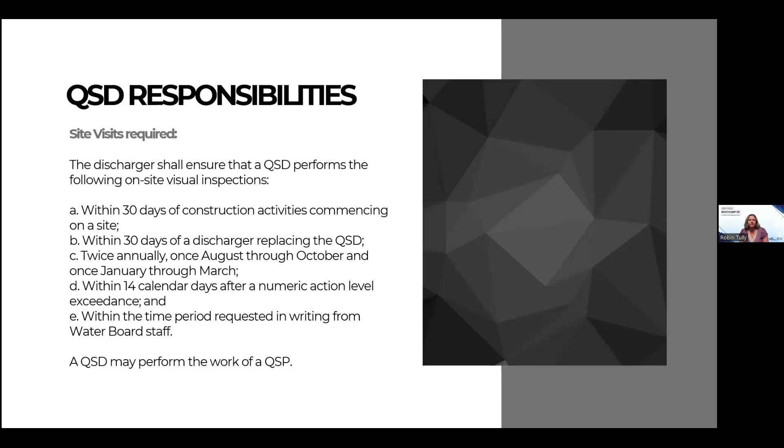All right. Next, I want to go into this Waterboard interview. It's about 17 minutes. I'll come back afterwards and talk a little bit more about some of the key things that they talked about and show you some good photos.

So anyway, these are two guys from the Central Valley Regional Water Quality Control Board that I've seen on site multiple times, and they are very good and insightful, and they're just trying to be helpful here. So they came for this interview. So hopefully we can get it to play.

My name is Jorge Belgium. I'm water resources control engineer with the Central Valley Regional Water Quality Control Board. My primary role here is construction stormwater inspection. And my name is Mike Fisher. I work with Central Valley Waterboard as well in compliance and enforcement. Deal with construction, industrial, stormwater, as well as wastewater treatment plants.

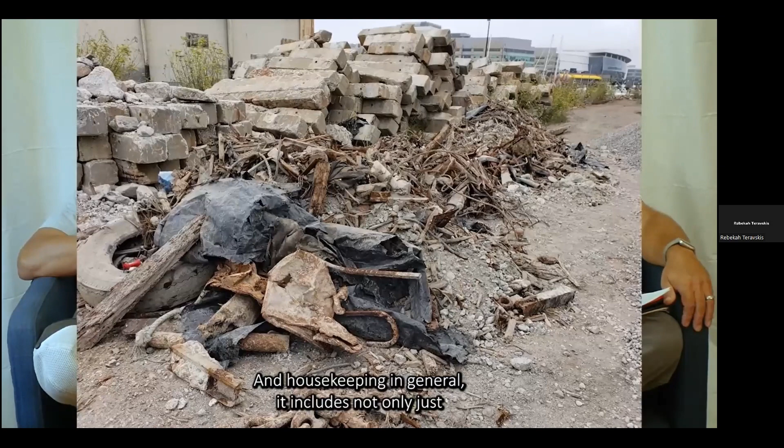Mike approached this question really well. He broke it down per season, and we're going to see different deficiencies depending on the season, right? But one thing that is pretty common and very prevalent throughout the whole year that we notice a lot, whether it's spring, summer, fall, winter, is the housekeeping, right? And this can manifest in very full dumpsters open during a storm event. It can manifest in garbage just being blown away to the winds during the hot months, right? And the housekeeping in general includes not only construction waste, but also concrete waste.

As the seasons change, we focus on different things. Obviously, the primary thing when it comes to winter is that the site has effective erosion sediment control BMPs to prevent a discharge. What erosion and sediment control BMPs would you like to see and when, especially winter? One thing to keep in mind, and we notice this in a lot of construction sites, particularly risk level 1 sites, whose erosion sediment control requirements are significantly less than risk level 2 and risk level 3 sites, particularly for active construction areas, right?

The trigger for risk level 2 and risk level 3 when it's raining is that the site be protected with erosion control at the time it starts raining, right? The trigger for risk level 1s is not really there for erosion control. But all the sites need to meet BAT/BCT requirements, right? Which translates back into erosion and sediment controls. Does your site have BMPs that meet BAT/BCT requirements?

A lot of construction sites that are risk level 1, because they don't have that in the permit to protect active areas with erosion control when it's raining, they will not do it. We see this, right? But as the site is discharging very turbid water, at this point they're not meeting the BAT/BCT requirements of the erosion sediment control BMPs. Where we see the biggest problem is in risk level 2 sites during the rainy season that don't have erosion control on active areas during a storm event and they're discharging water above the NALs, right? That is going to be a trigger every time.

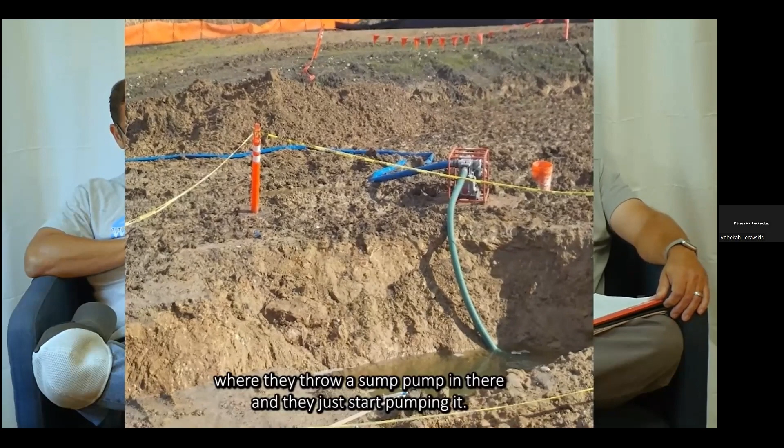If you're going to impound water, have a plan on how you're going to dispose of that water. There's quite a few sites that can hold water just fine most of the season. It'll infiltrate, it'll evaporate, and you're not going to have a problem. But there's a lot of sites that run out of capacity. And by the third, fourth, fifth storm, suddenly they need to dispose of that water. We've walked up on sites where they throw a sump pump in there and they just start pumping it. Sampling, yeah, maybe not. Is it going to a creek? In some instances, yeah, straight into the creek.

If you're going to store water, that's fine, but make sure you have a plan on how to dispose of that water if you're out of capacity. And you should really know how much capacity you have. I don't think the permit really requires that you calculate the capacity before you start doing it, but you should have an idea. Hey, 3 inches of rain is coming. Can I handle this or not? Right. It shouldn't be a gamble.

You should know. Also, if you're dewatering groundwater for construction, for installing utilities, our region does have a separate dewatering permit. In some regions, the construction stormwater general permit addresses dewatering, and they're covered under that. For our region, because we have a specific dewatering permit, if you're installing wells and pumping out groundwater, you need to contact our office, and there might be a waiver if you're land applying. There might be a separate NPDES general permit if you're dewatering and it's going to the storm drain or to surface water.

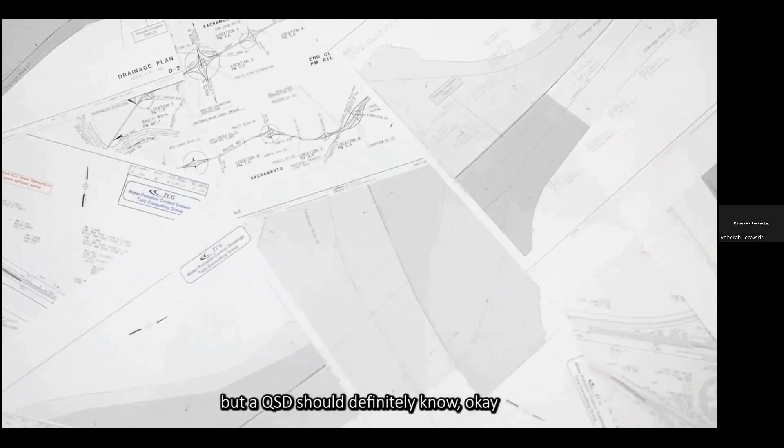If this is a development project, when they're going to vertical construction. In the meantime, like Mike said, there's a lot of phases in there, right? You have your clear and grubbing, and then you have your mass grading, rough grading, you go into your road cuts, and then you bring in your utilities and all that stuff. It may be overkill to have drawings for each one of these stages, but the QSD should definitely know when things are changing and the changes that they need to make on their guiding document for whoever's going to be on site to deploy.

I think this is what the QSP is going to be focusing on when out there doing inspection, right? Are the perimeter controls where they should be? A lot of times contractors will go out there and start clearing more area than is actually shown on the plans. I issued a lot of notices of non-compliance on sites that were under an acre, but the subs started opening more ground than they should have, and all of a sudden the municipality is letting me know, I think this is over an acre now. I'm like, oh, well, they need to sign up for coverage. I'm bringing this up to illustrate that a lot of times what we have in the initial drawing is going to change as the project moves on.

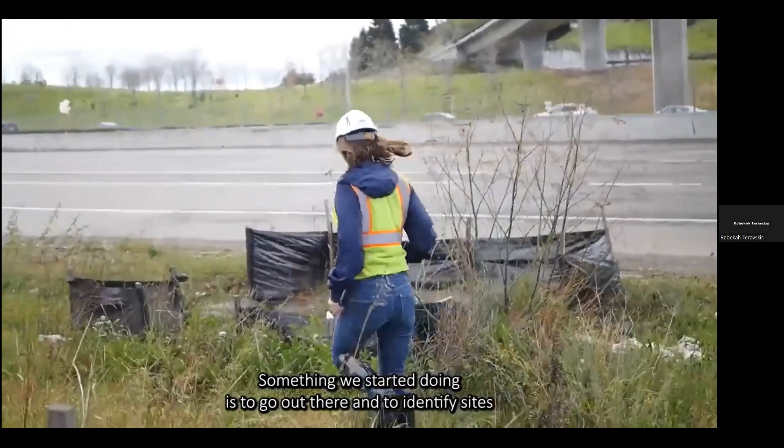I think it's definitely beneficial for a QSD to be out there as we go into the rainy season months to evaluate site conditions, and maybe the BMP plan may change completely. Something we started doing is to identify sites that are starting late, right? They're starting their grading in October, and it's a large site, which means a lot of open area as we go into the rainy season. So it's very beneficial for the QSD to be out there before the rainy season to get an inventory of what BMPs are needed and the stage the construction is in, because it may not pan out according to the schedule, and develop a winterization plan.

So the term winterization plan, you can search for it in our permit, it doesn't appear. No, it's something that we ask for informally after inspections. If we get to a site in the first week of October and they started grading 2 weeks ago and there's 50 acres open, that's gonna cause a little concern on our end.

So we're gonna ask for a winterization plan that basically communicates to us, once it starts raining, what's the site gonna look like? What is gonna be active through the winter, what's gonna be inactive, how you can protect the inactive areas, and how you can protect the active areas before a storm event, but also how long is it gonna take you to protect those areas?

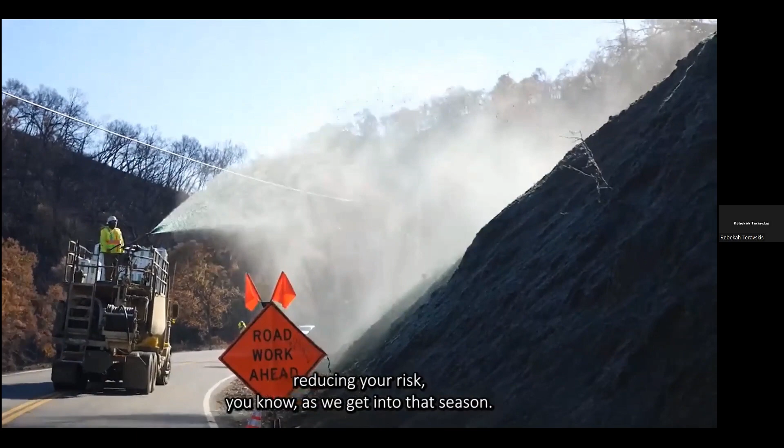Any other thoughts you might have for QSDs for achieving best compliance? This is a district permit, right? So winter or rainy season is really our primary focus. Something that to me is always important is start reducing your risk as we get into that season. A lot of times sites get into trouble because they're always waiting to either install that base rock or do that next lift or the last lift, and the roads end up staying open through the winter. And that creates a lot of problems for a lot of sites.

I think the story is, oh, we just need 2 more weeks, and in 2 more weeks we would have had the whole site paved. If it looks like you're not gonna get there, I would say at the very beginning, this is an autumn thing, right? Whatever we get done up to this point, we get done. After that point, let's start reducing our footprint, let's start reducing our risk.

And I think that's really important to talk about with the project owners and the other project managers. We need to start thinking about how far we can really get so that we don't get caught behind. What happens is once it starts raining and you haven't implemented BMPs, you're just bleeding until it stops raining and you're able to do what you should have done 3 weeks before.

Yeah, the permit definitely allows you to continue construction through winter. We're not saying, hey, October 15th, stop it. No. You can grade through winter if you put in the BMPs before rain events, but it's gonna be pretty costly to have big areas open through the winter. So the smaller your disturbed area is in winter, the easier and probably cheaper it's gonna be as far as BMPs go. I know there's always other concerns with schedules and milestones, but yeah, shrink it.

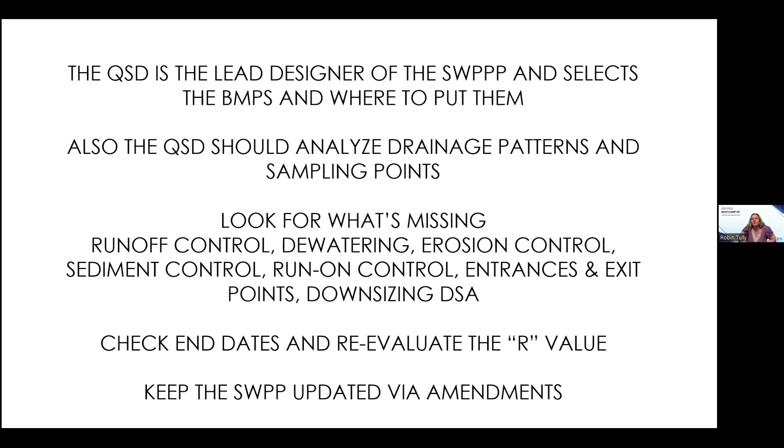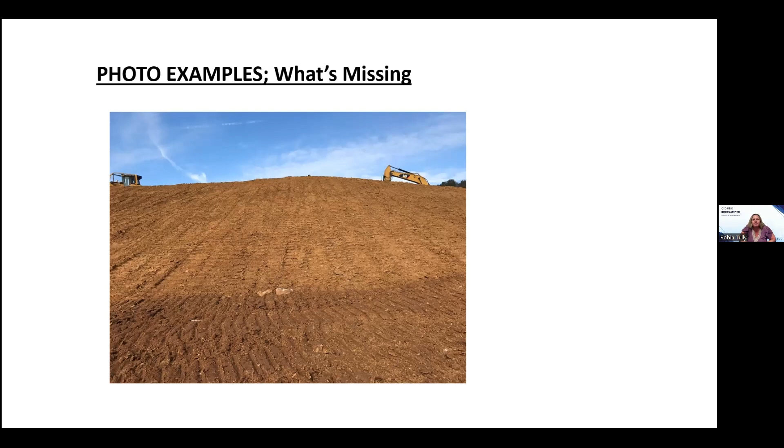So sediment controls, they can stop maybe those small, little 1/2-inch rainstorms in the summer. But come winter time, when you're getting back-to-back storms, or maybe we're going to have an atmospheric river again and it dumps 7 inches of rain in a day. That happened. That's not going to cut it without erosion control. So you really got to lead your client to get that erosion control in ahead of time.

But you really need that erosion control. That's the key thing. That's going to help keep your sediment on site where it is. So that's your hydroseeding and your bonded fiber matrix, hydraulic mulch, blankets, etc. And we'll talk about that.

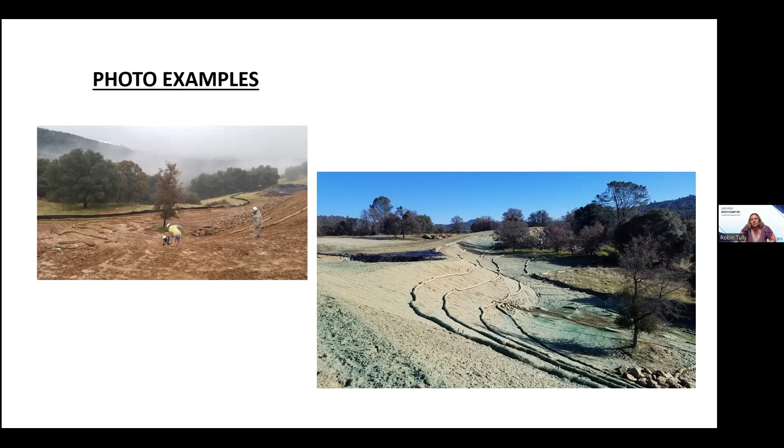And then by the time they called the erosion control guys, the subs just weren't able to get out there until after a couple rains had passed. And unfortunately, this led to a lot of turbid water getting into a creek downstream. And the Water Board showed up Monday morning at 7 a.m., followed it all the way down the slope to the creek, and this resulted in a $130,000 fine.

That was 2016, and I'm here to tell you that nowadays the fines that your site could possibly be facing, and you'll get drug into, are in the millions. So I don't think anything's out of the norm now to see the Water Board come at your client for 1.2 to 1.6 million or something like that. So you really want to avoid this. I don't want this happening to you. So let's think ahead. Let's get out there and see what we can help people do for winterization.

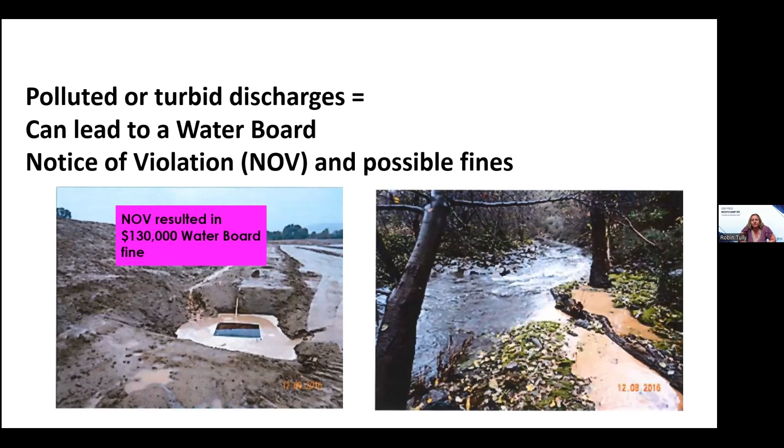And then it would have a new dike eventually. So that gravel bag berm was a really good temporary run-on control that I think is very important. And if you did nothing, the two things that were probably the key things were getting that run-on control, that gravel bag berm, and the silt fence. But all of these BMPs obviously did the best. And this was probably one of our most successful slopes after we got it fully buttoned up.

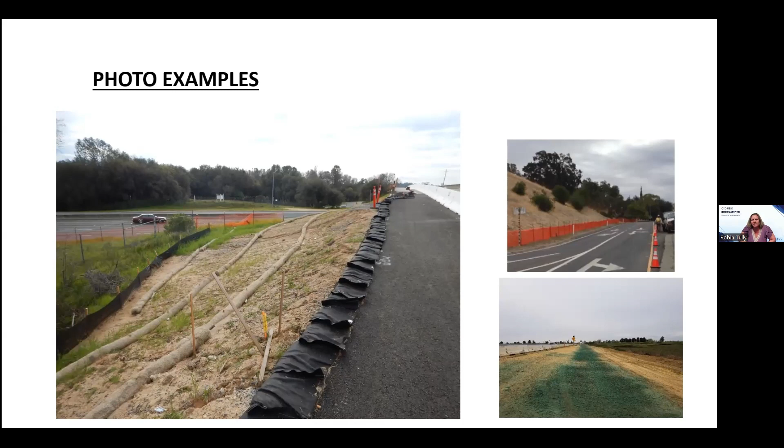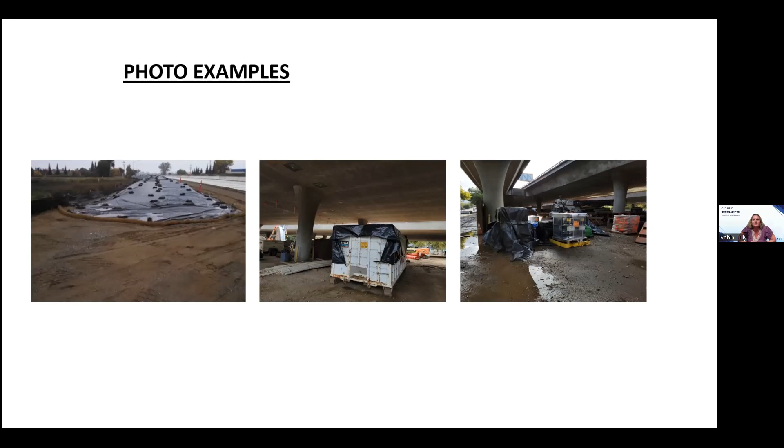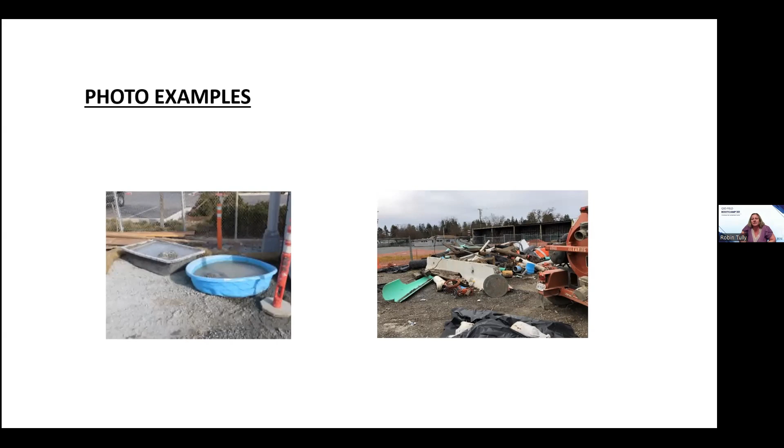So think about that. And then like the Water Board said, housekeeping, that's always a big consideration. You really want to have your client keep up on their housekeeping. This is also a Water Board attractant. If your site looks like crap from a drive-by, it's going to encourage them to come in. So having your site looking good and clean is pretty important. Also, that waste, when rain hits it, whatever the chemicals are that are in there are possibly contacting the stormwater and running off. So that's a source of pollution. So good housekeeping is very important.

All right, so erosion control. You're the QSD, so I challenge you to pick the right type of erosion control for your site. The QSP is not technically responsible for that. So you should be determining the type of erosion control in your SWPPP, and then again, coming out to the site and making sure to adjust that if something is needed. So I'm just talking about the major types here. We've got our geotextile blankets. We've got plastic cover. Obviously the Water Board doesn't want to see a lot of plastic cover, but there is a time and a place for it.

When you've got an active slope you want to protect for rain, and then they want to work on it a couple days later after the rain, that plastic will keep that slope dry. So there is a time and a place for plastic.

Number 3 is temporary hydraulic mulch. That's a really good one for large areas, and one that we really encourage over the winter time to plan ahead. There's hydroseeding, which is your hydraulic mulch with the seed included. That's your permanent erosion control generally. Mostly you're not going to use that for temporary measures, but you might have some areas that are ready. And if you have areas that are ready, absolutely get your permanent hydroseeding on them. That'll help.

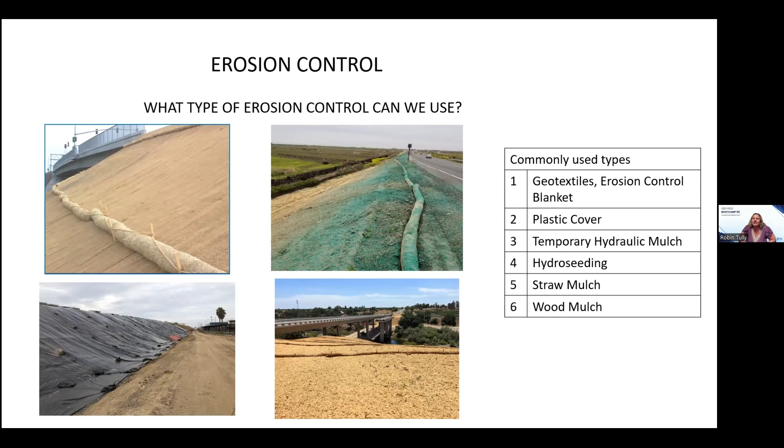We have straw mulch. We've used it in limited cases. There is a time and a place for it. And then wood mulch. Wood mulch is also a consideration for erosion control.

All right, let me check the time and see how we're doing. All right, 1:38. All right, we're doing good.

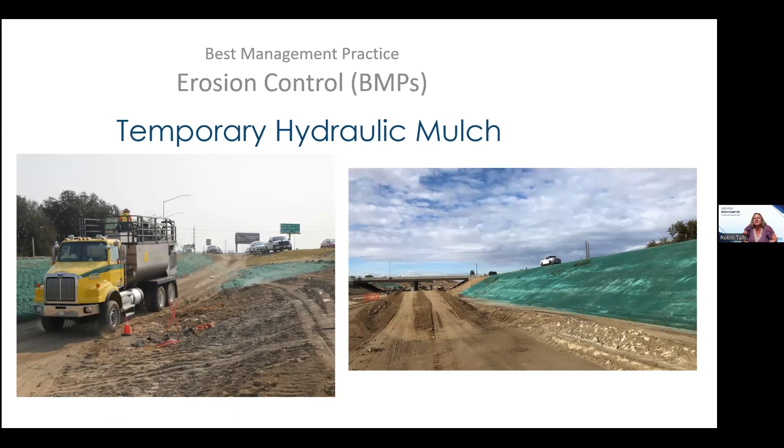All right, so here's what temporary hydraulic mulch looks like. Very good for covering large areas. You just want to make sure you get it implemented ahead of time, ahead of rains, because it needs a day or two to set up. Caltrans specs, for example, will actually have a specified minimum time frame. So if you apply it too close to the rain, or even in the rain, one, it's just not going to set up well. And two, you might not be getting paid for it, or your client might not be getting paid for it. So pay attention to that. You really want to encourage that to be applied as early as possible.

Blankets are excellent. They are a great way to really protect your soil without a lot of hassle over the winter, because you're not going to be able to go respray erosion control. These are an excellent way to get erosion control, but make sure that they're keyed in properly. So you want to have a key trench at the top, and then they're rolled down the slope and overlapped, and pinned in.

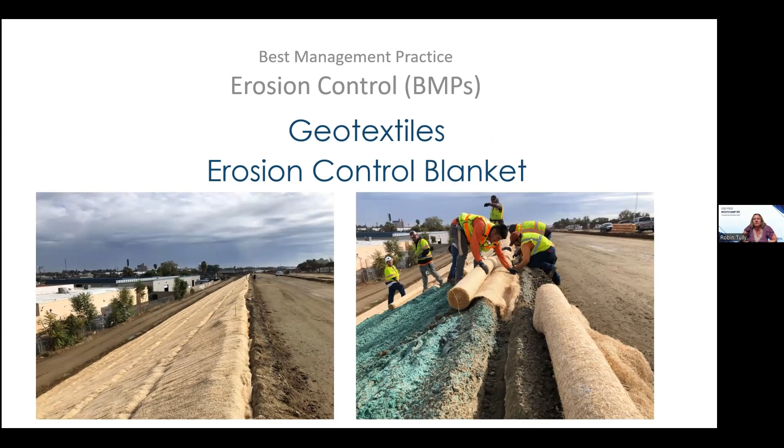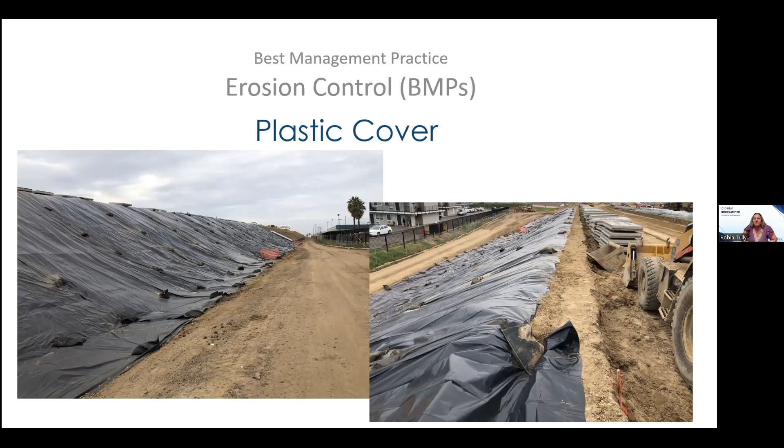Plastic is a great way to protect an active slope that the contractor wants to get in and work on a couple days after the rain, so there is that time and a place for plastic. Again, do make sure that that is keyed in properly at the top of the slope. Otherwise, you can get water underneath that plastic, and it can be as if your plastic wasn't even there. So that key trench on your plastics and your geotextiles is hugely important.

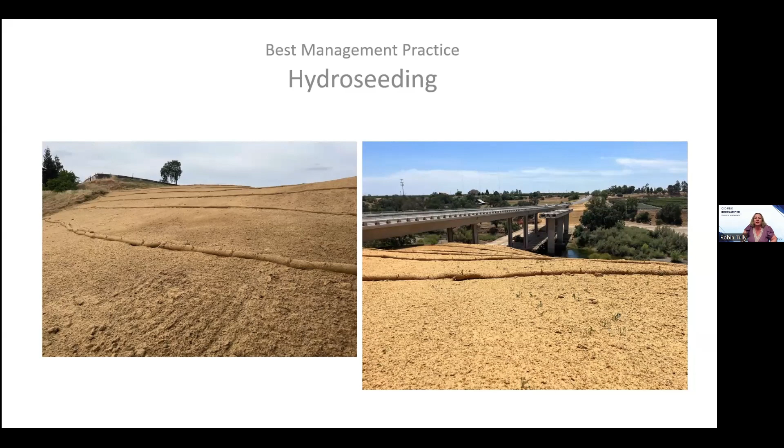Straw mulch. This is some permanent erosion control. There was some hydroseeding, and the spec called out for straw mulch on top. Straw mulch to be effective should be tackified. So don't think that the contractor can just spread it out there and it's going to be effective. It really needs a good coat, like 4 to 6 inches, and it needs to be tackified on the top. But then it can be great.

This straw mulch actually was very effective at establishing the hydroseeding, because it was giving a nice cushiony blanket to prevent a lot of the friction of the rain hitting the soil and dislodging soil particles. So it's protecting that soil just like a blanket. But also it was providing some good ground cover, keeping that seed warm until it got established. So straw mulch can be a great thing.

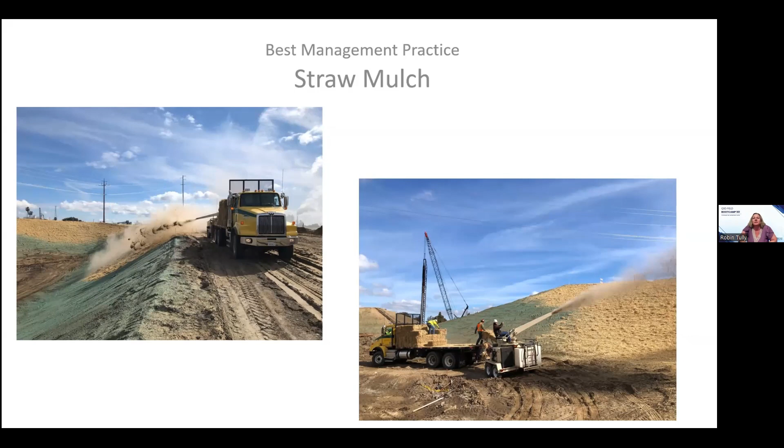And wood mulch. So let's say you have a site where you've trimmed or cut out some trees, chip them up in place, save that wood mulch, especially over winter time. A lot of the contractors have to get in and cut down trees before the birds start nesting in them. So the contractor might have to go in and work in the winter on a site. I would encourage them to keep those wood chips there, because they make great and free erosion control.

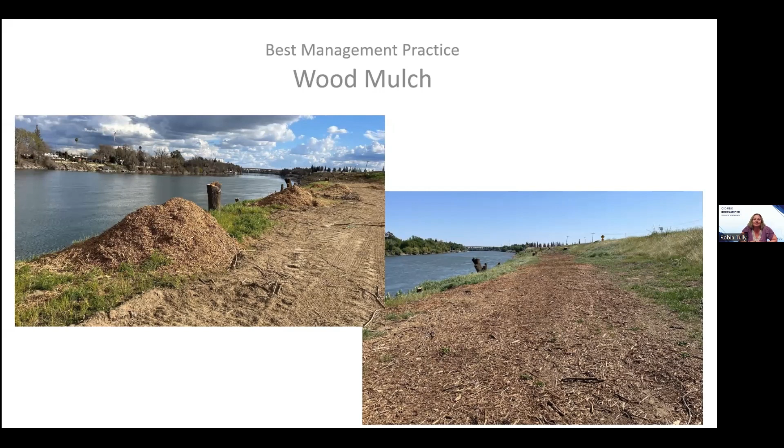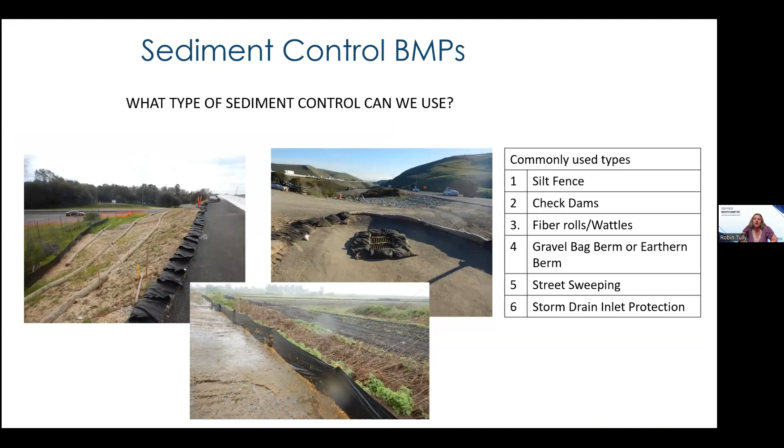Sediment control BMPs. So these are very important. They should be there all year round. There are different ones for your toolbox. So I'm listing the most common ones here that you're going to need to plan for and should be already in your SWPPP: silt fence, check dams, fiber rolls, gravel bag berms or earthen berms, street sweeping, that's a sediment control as well, and storm drain inlet protection.

So fiber roll, I'm running out of time, so I don't want to go too in depth. If you want these slides, I can give them to you. These are some key takeaways.

But the important takeaways on fiber roll is just make sure it's ideally on a level contour. It's got to be trenched in and staked in properly. And just make sure that they maintain it and use it for those slope interruptions. Don't just have a fiber roll at the top or the bottom. Have it every 10 feet if you have a 2-to-1 slope. In the BMP fact sheets, there should be a table for different slope inclinations, what fiber roll spacing is adequate.

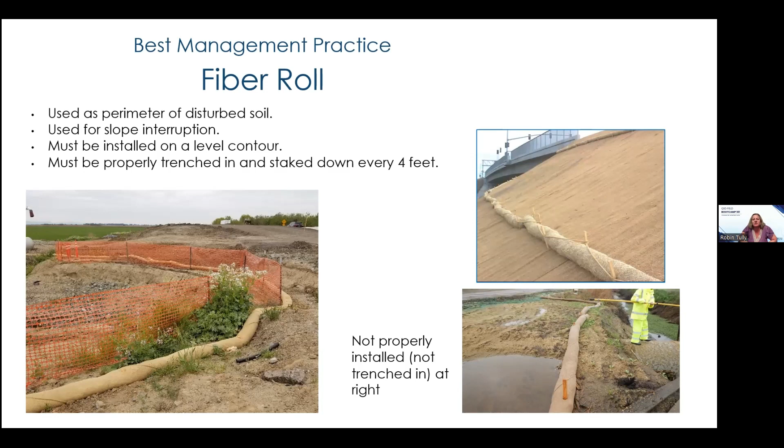Silt fence. Don't put your silt fence on the slope. Don't put it in a flow line. Those are some key takeaways. Make sure that it is properly trenched in and staked in. Make sure your joints are overlapped. Make sure the stakes are on the right side. One of the pictures on the bottom slide is the stakes were on the inside.

That was done for wildlife purposes, because they didn't want the critters climbing up the stakes if they were on the outside and getting into the job site, mice and such. But just think about that. If it's an ESA fence, it's keeping out your wildlife, but you can't really use it as a silt fence. So if you are using this for silt fence to impound water, make sure those stakes are on that back side. So those are just some key takeaways.

Make sure you put it at your bottom of the slopes, far enough off the toe of the slope so that any erosion that's coming down isn't going to immediately overtop the silt fence. Give a little space there at the toe for that sediment to collect before it starts backing up against the silt fence.

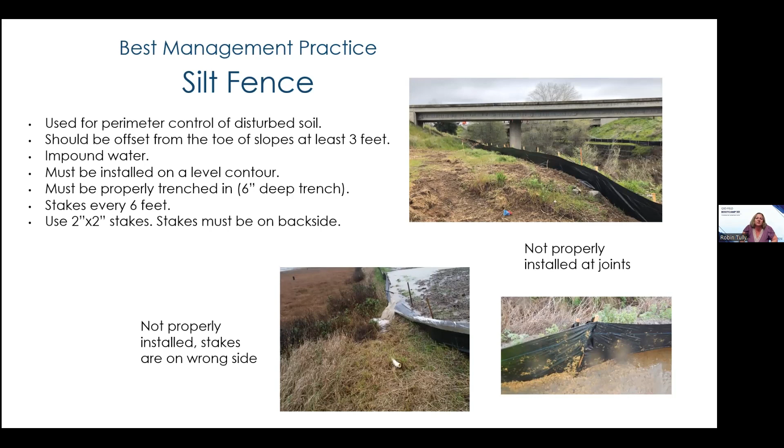Gravel bags. Gravel bags are a great check dam, and they also can make great inlet protection. They are very good at keeping sediment and water out. So do be very careful with where they are placed. If you do use them as a check dam, make sure that they follow the details and take out like the center bag or two, so that the water can actually go over the check dam without being too impounded and going around the sides and causing erosion around the sides.

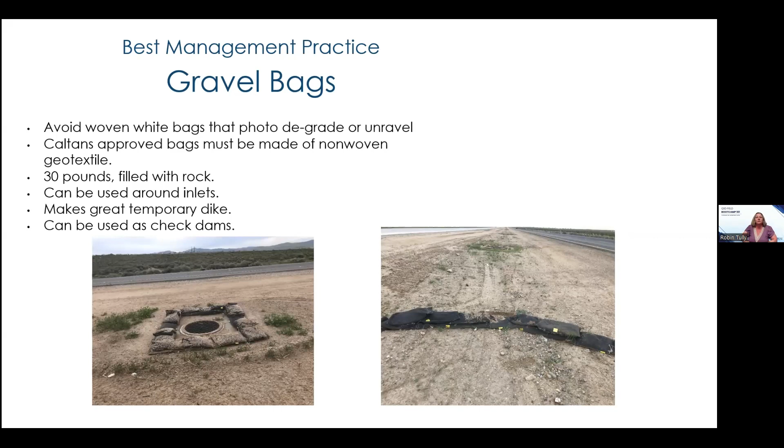So gravel bags are a great tool. That one picture that I had prior, and I'll show it again, they were using as a temporary dike where your AC dike is missing. So they can be very, very useful. These are always great too as your catch-all emergency BMP. Have the contractor have a pallet or two of gravel bags on site for problem areas over the winter.

Storm drain inlet protection. This should be in all year round. The thing I want to mention here is to avoid filter fabric in the wintertime. You can use filter fabric in the summertime to protect your inlets, say from paving and paving materials, and you don't want anything getting into those inlets. But it's not a Caltrans approved BMP. So if you're on a Caltrans job, don't use filter fabric, use an approved sediment bag.

And then definitely by wintertime, any filter fabric that you had in place, make sure that you put in those sediment bags and take the filter fabric out, because the filter fabric will block flow. And wintertime, you have to have your water flowing, unless you can impound everything and you've done the calculations to show that you can adequately contain all your water. I'm going to tell you, most sites can't over winter, they just don't have the space.

So you've got to make sure to get your erosion control. So keep your dirt in place in the first place, and then have those inlets protected properly so that they can drain, and hopefully filtering out turbidity.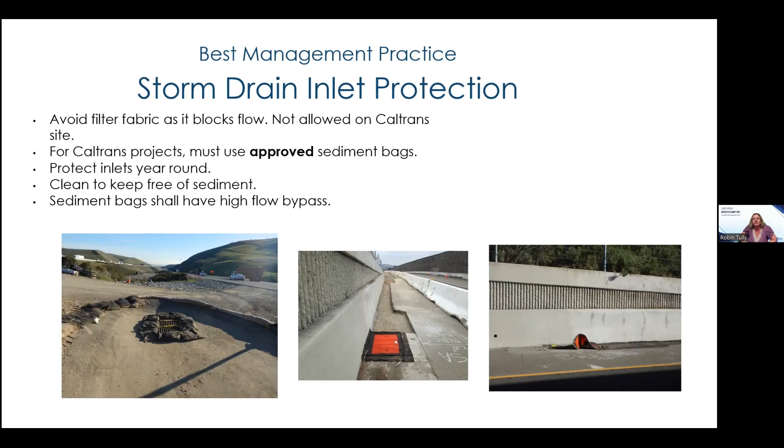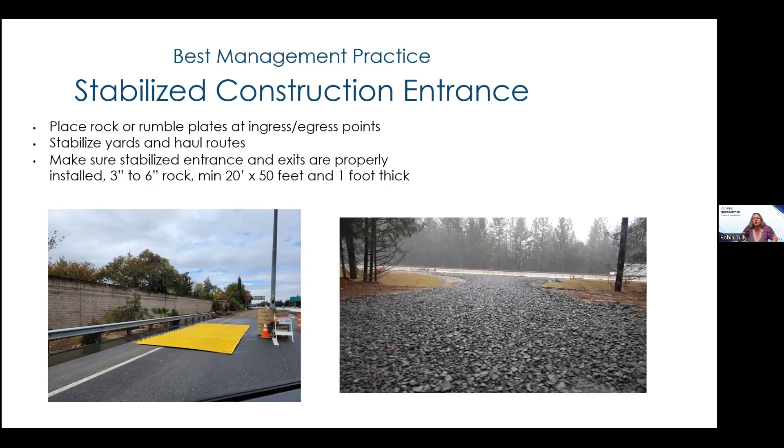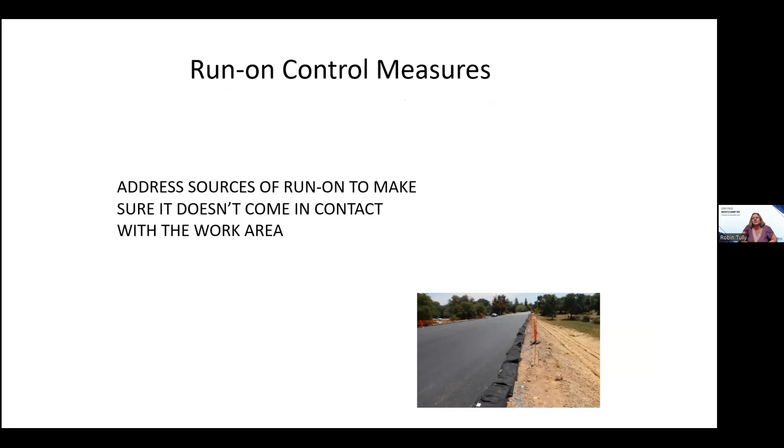I'll talk about run-on control measures. So I talked about them before. That gravel bag berm is one very good example to keep that run-on from the roadway from going over the slopes. So you want to address your sources of run-on to make sure it doesn't come in contact with the work area. So you as the QSD, go out there and see what's missing. What run-on control measures are you missing?

Here's some photo examples of what can happen when you don't have good run-on control. This was the vertical clearance job where we thought we had it in good control. It had hydraulic mulch, it had the fiber roll, it had some silt fence in place, but the dike was missing and a lot more water came off the bridge than anticipated. It was a heavy storm. I got there and I was monitoring it, and it was like a 2-inch rill.

And I was like, shoot, well, we'll have to get something back when it dries out and we can get back here and work on it. But what happened though is a thunder cell came through, and as I was driving away, I think I was 15 minutes down the road, I went through this thunder cell and it was just dumping buckets, and I went, oh crap, what's going to happen? And sure enough, I came back the next day, and those 2-inch rills were 2-foot rills, due to the water coming off the bridge and going down the slope. Luckily, it mostly was stopped by the silt fence.

It got beyond a little bit and we had a little bit of cleanup, but we talked to him about getting out gravel bags for that run-on control, and that worked awesome. That kept the water off the slope and made sure that the water was going down to an inlet instead of over the slope. So that run-on control is super important.

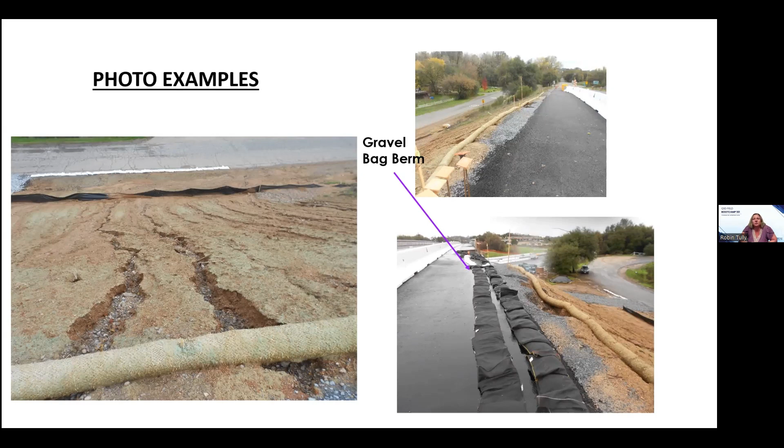So think about that. Other sources of run-on: this is a highway job where, again, the plan is there's going to be storm drainage there and a new roadway there, but it's not there yet. They're grading it. And going into winter time, we need some temporary drainage. So think about that. Your new road isn't there yet. So here's a culvert outletting out of the job site. We needed to figure out a way to get it safely through the job site without causing erosion.

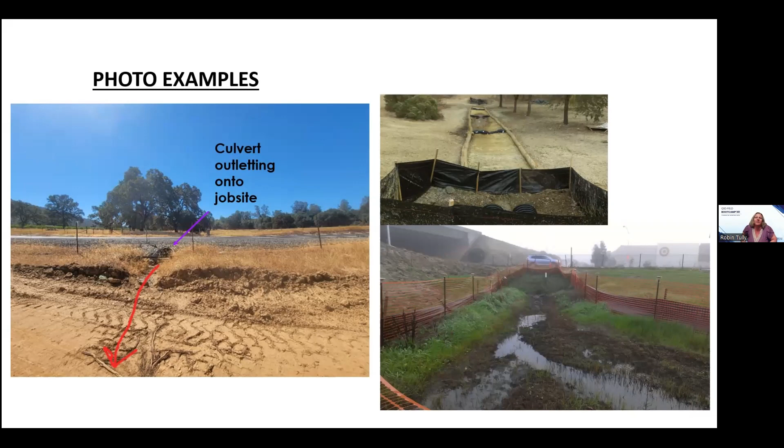The photos at the right are just some examples, not that particular job, but different jobs where we had the culverts coming into the job site, and we appropriately protected it and gave it a safe flow path that was protected to get through the job site. There's that run-on again coming through the job site. This was on Highway 50 many years ago. So 65th Street.

Another thing that you got to think about is your slope conveyance. Do you have water coming over your slopes that needs to go over that slope because maybe the down drain isn't there? So maybe you're putting in a down drain, designing that down drain in, or you're giving it a temporary flow path. This was an example of, we had some runoff coming off the roadway and it needed to go down there. So there was an overside drain there before. So we gave it a flow path.

We lined it with plastic. Maybe not the super best example, a pipe would have probably been better, but there just wasn't the way to get that configured in. So give the water a safe flow path down slopes without causing erosion. So think about where do you need those during winter time.

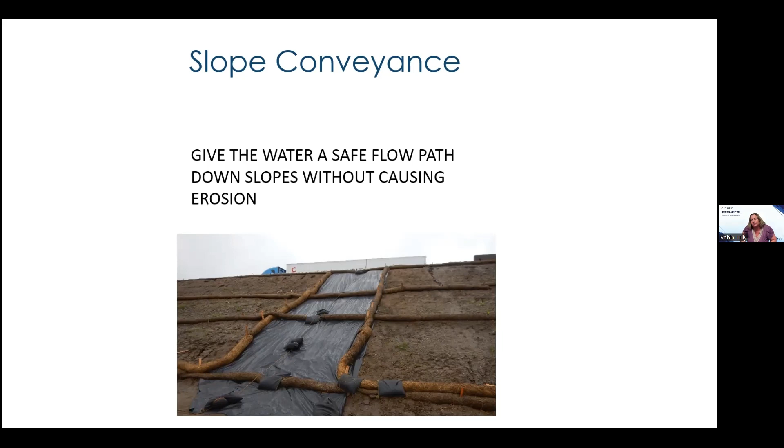All right, that's probably all we have time for. So there's a lot of other considerations, but hopefully these are some big takeaways for you.